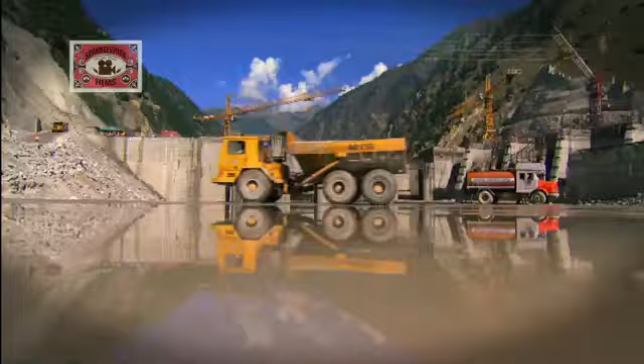Over millennia, Himalayan mountains have fortressed India's northern frontiers. Now, on these very peaks, captains of industry are writing an audacious new chapter in India's power story. They will battle the elements to achieve incredible innovation. It's the ultimate joint venture between man, machine and nature. This is the Karcham Wangtoo Hydel Power Project.

Himachal Pradesh, India's gateway to the Himalayan ranges. Mountainous terrain and stunning vistas make for a tourist's delight. But flowing through these valleys is the key to unlocking India's energy potential, the river Sutlej. These waters are vital to driving the fifth largest power market in the world.

In fact, India's hydropower potential is immense. If tapped, it can generate nearly 149 gigawatts power. But in the race to harness this energy, who is willing to brave the mighty Himalayas?

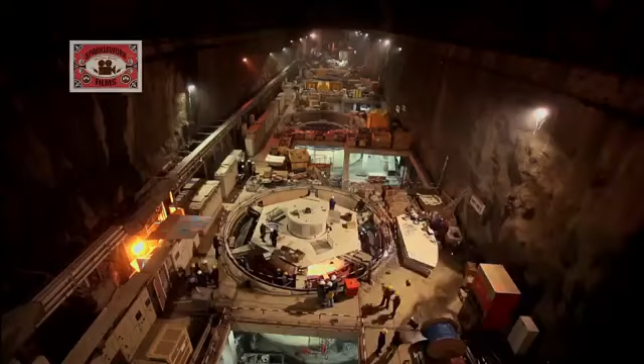When the organization was thinking of implementing the Karcham Wangtoo project, all of us were determined that let us create an aggressive timeline. So we thought let us keep a time frame of 5 years and then we will work out whether we can better it. Now, with the clock ticking, it's all about finding the perfect location.

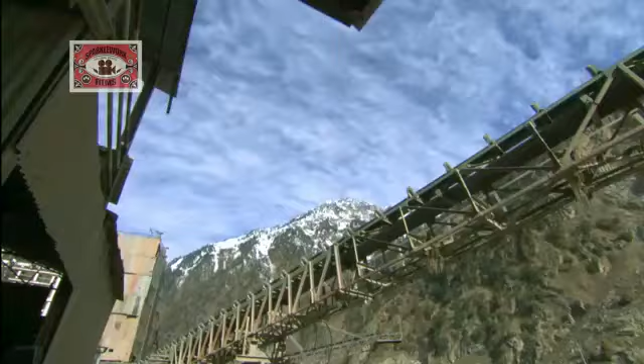At first glance, the tiny hamlets of Karcham and Wangtoo seem an unlikely site to realize an ambitious megastructure vision. Surrounded by jagged peaks, prone to sub-zero winters and accessible only by steep mountain roads. But when it comes to the science of generating hydropower, this valley is tailor-made.

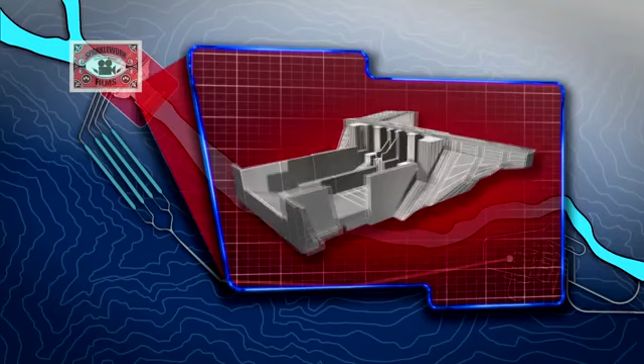The river Sutlej provides the mass of water. The steep gradient between the proposed dam site and the power plant provides the ideal head. The main dam at Karcham will divert a mass of water from the Sutlej into inlet gates. Water will then travel along the nearly 17-kilometer-long head race tunnel, or HRT.

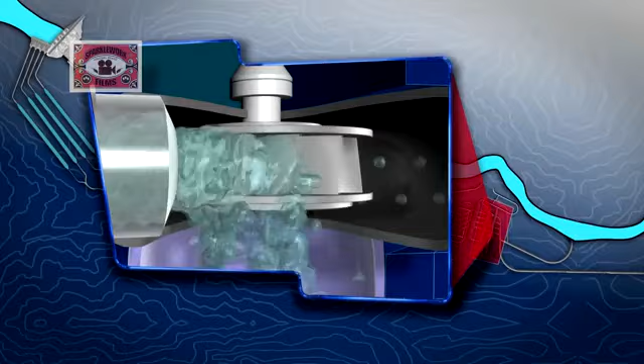From here, it's a steep drop through a height or head into the turbines of Wangtoo's powerhouse. It is here that the river's kinetic energy will be transformed into electricity. Further onwards, the river Sutlej will flow out through the TRT, or tail race tunnel, back on its original course.

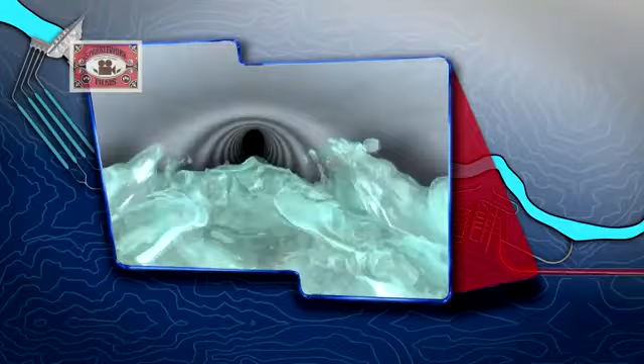With the blueprints in place, it's time to set the works in motion. Strong winds blow across an intimidating landscape, and it's immediately clear setting up this construction site is not for the faint-hearted. In order to realize this onerous task, the builders commissioned their top commander to set up base camp for the men and the machines needed to build this megastructure.

Brigadier Upal brings over 35 years of experience in the Indian Army to the Karcham Wangtoo project. Almost immediately on reaching the site, he knows it's an uphill battle. In the mountain, it's very rare to find a flat piece of ground. A river flowing and hardly a bank of the river, and the bank was also very low, just running along the riverbed. So to create a camp in a terrain of this kind, we had to literally fill up the whole place with a large amount of boulders, stones, rocks, sand to bring it up to the height what it is today.

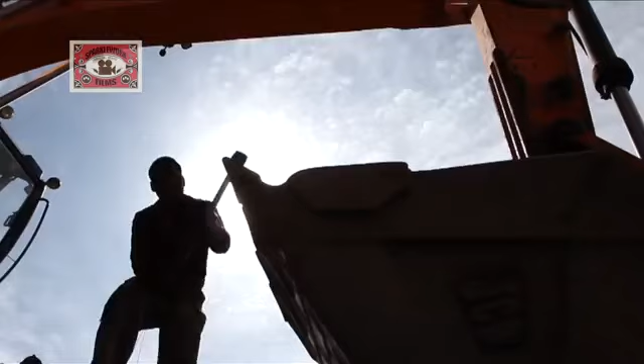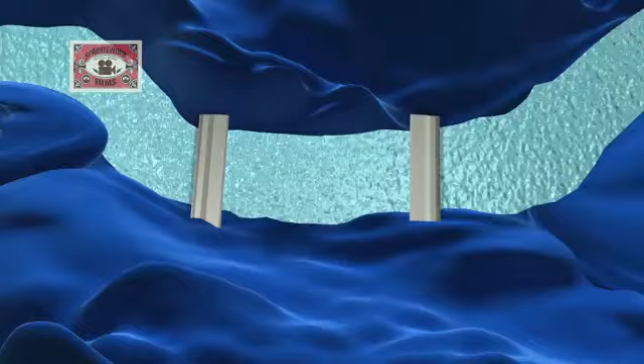Deep in the gorges of Karcham, excavation for the dam's foundation is scheduled. But before digging can begin, there's a river to divert. The Sutlej must be temporarily diverted through a 541-meter diversion tunnel. Two cofferdams will help maintain the river's new course, preventing water from seeping into the main dam's construction site.

Cofferdams are temporary structures, often made from rockfill, which can get washed away with every monsoon. But with the clock ticking on the project's record-breaking deadline, this dam site requires a sturdier fortress. Designers create a cement-reinforced structure that won't need to be rebuilt after the rains. With the Sutlej successfully diverted, it's time now to build the dam.

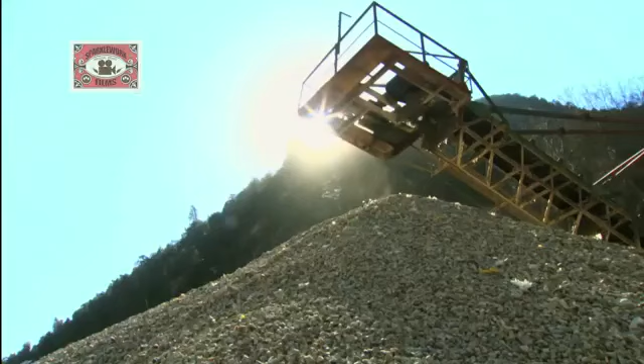At the helm of affairs is Civil Works in charge K.K. Sood. He spent the better part of his life building hydropower projects across India. When I started my career about 33 years back, a 100 megawatt project used to take 15 years for completion, and about 10 to 12 years back, a project of the magnitude of 300 megawatt used to take about 7 years. Now, K.K. Sood's men must ensure that construction on a 1,000 megawatt project is completed in under 5 years.

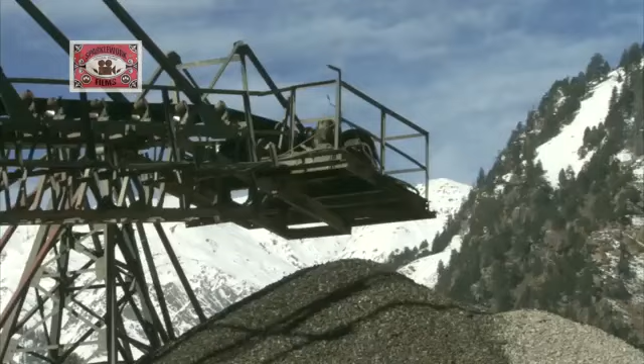But as the team prepares for dam excavation, it realizes that plans set by men are often overruled by nature. Geological tests reveal startling information about how deep the dam's foundations would need to go.

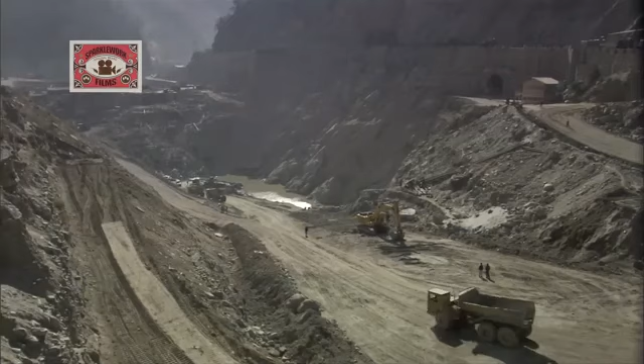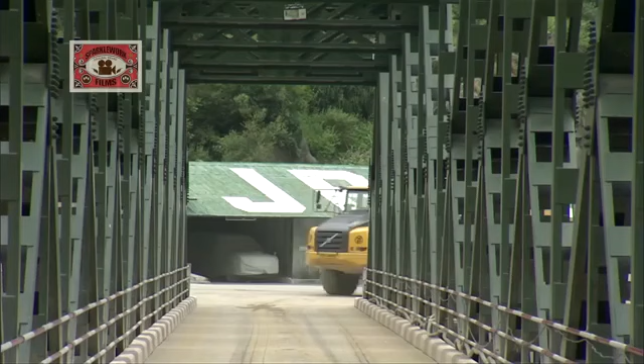Most dam foundations in similar locations go no deeper than 30 to 40 meters below the riverbed. At Karcham, the difference between the riverbed and the dam's deepest foundation level is measured to 53 meters. Engineers now stare at the prospect of going at least 10 to 15 meters further underground. They are faced with two choices: delay the date of completion and miss the deadline, or make way for the big guns of construction.

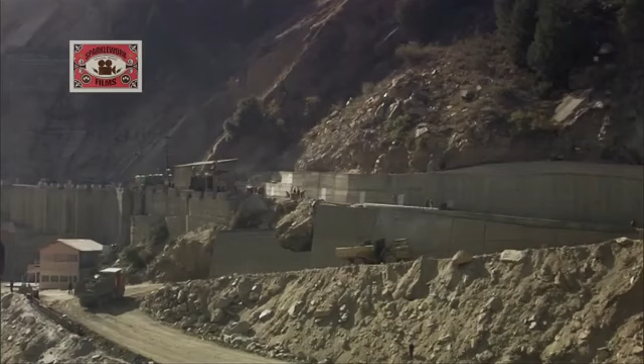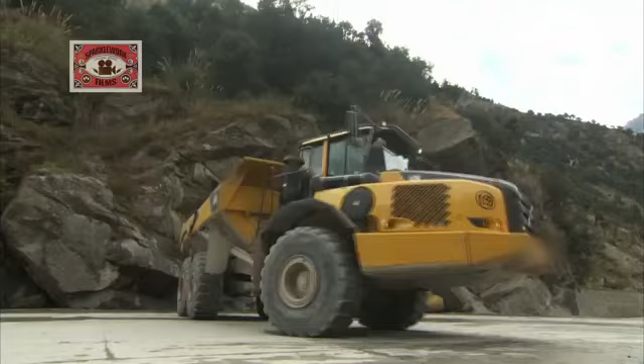Within the stillness of this North Indian landscape, there's frenetic activity underway. The foundations of the main dam at Karcham have reached depths of over 50 meters below the riverbed. Removing the excavated material is a major challenge, one that conventional dumpers literally can't rise up to. So the builders call in the big guns of construction: six-wheel drive articulated dumpers. Their combination of flexibility with pure muscle allows loads of up to 37 tons to be carried up a height of 1 meter along a length of just 5 meters.

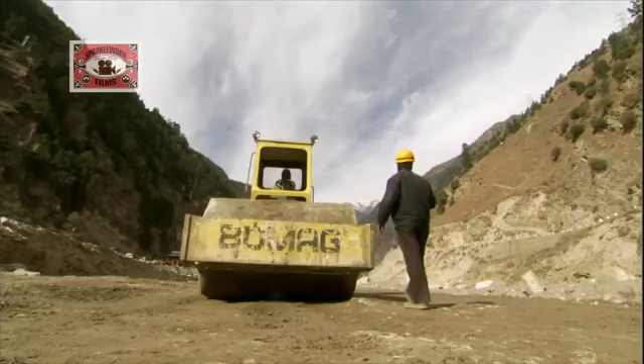While these machines expedite excavation, engineers turn to another pressing concern: securing the cofferdam at depths exceeding 50 meters below the riverbed. The design team takes a bold decision: large-scale cement grouting of the cofferdam's foundation up to depths of an extraordinary 67 meters.

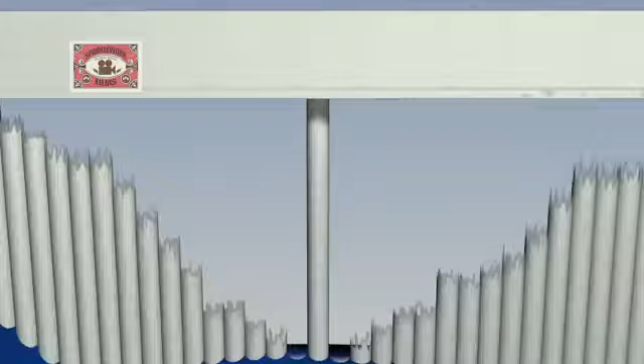We opted for jet grouted columns. This is nothing but an interlocked row of columns of concrete constructed by drilling holes. We lowered a pipe with a nozzle and pumped the cement grout at a high pressure. So there was overlapping of the columns and a continuous impervious curtain in the riverbed was available.

As one problem is solved, another one quite literally seeps in. Work on the 1,000 megawatt Hydel power project is moving along smoothly when a minor trickle in the cofferdam becomes a deluge. The river Sutlej seeps into the main dam site, threatening to undo 2 years of excavation and building. Dam in charge Sanjay Gupta rushes to the site.

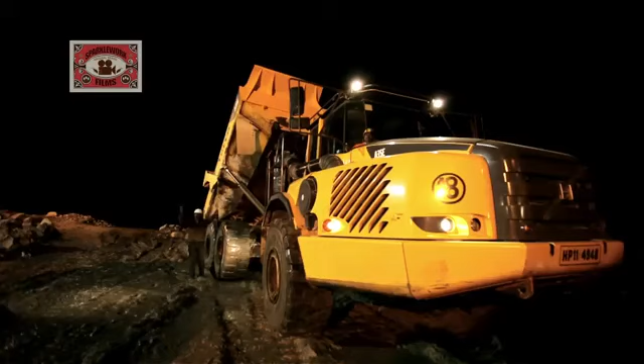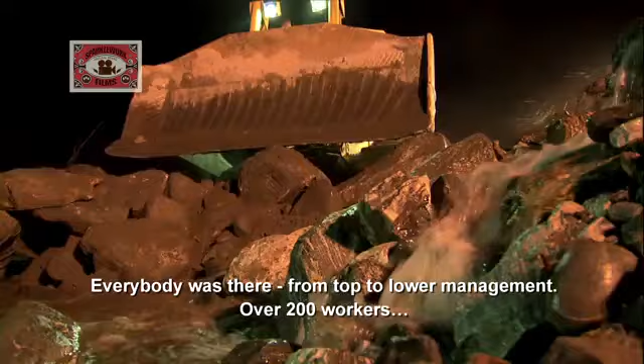Bulldozers erect a wall of rock, while dewatering pumps work round the clock to stem the flooding. Everybody was there. Every man, top management, middle management, lower management, around 200 laborers. That was something different. You can say total satisfaction.

24 hours later, the worst is over. The team has managed to convert a serious roadblock into a badge of honor. But there are bigger accolades to be earned, ones that will truly render the project a megastructure. Engineer Ashish Bajaj picks his steps carefully inside the dam's intake sedimentation chambers.

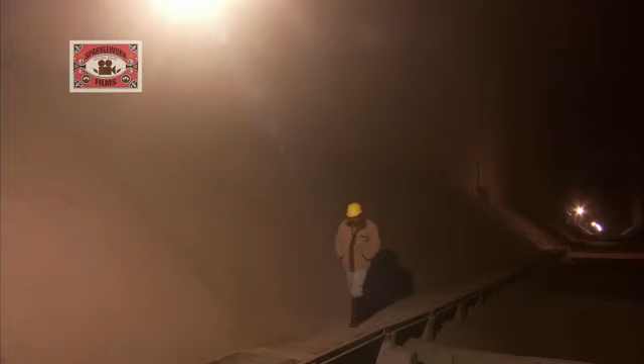Sedimentation is a process that removes suspended solids from water. This cavernous expanse is the project's crowning glory. Its task, taking on the Sutlej's silt menace. The Sutlej carries large amounts of river sediment in its waters. This spells murder for power turbines, where particles as tiny as 0.2 millimeters can shut down massive Hydel plants.

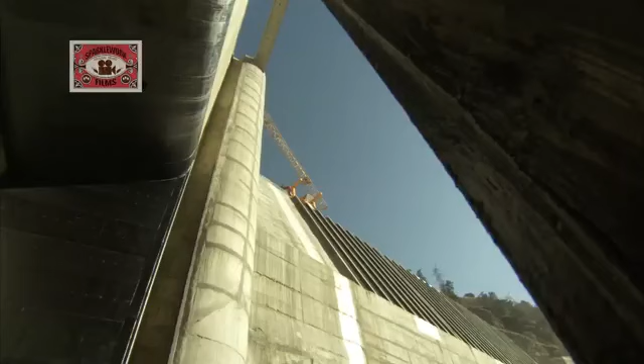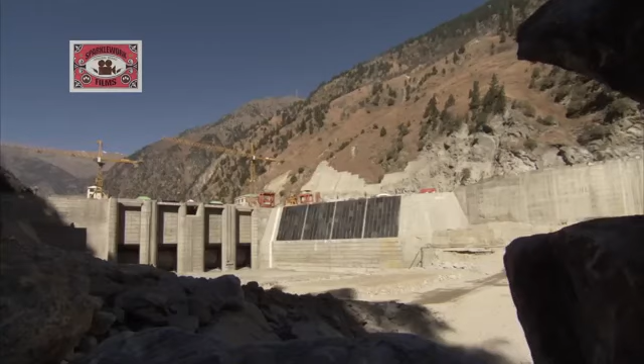To avoid this fate, water is made to enter the tunnel system 15 meters above the riverbed. This ensures that only surface water with reduced sediment flows in. To seal the deal, designers create 4 adjacent sedimentation chambers. Once the dam is filled, from intake it will be 4.5 meter per second velocity of water that will come in.

And in the sedimentation chamber, that has been brought down to 0.3 meter per second, so that the water gets stagnant over here. And there are 53 cones, 53 hoppers, through which these particles will get down to the flushing tank. Gravity guides silt through these 5.25 kilometer long flushing tunnels, back into the river downstream. These are the longest flushing tunnels to be found in the Indian hydropower sector.

But the record-breaking streak doesn't end here. These sedimentation chambers have a design discharge of 504 cumecs. That's a whopping 504 cubic meters of water per second. This is the world's largest chamber volumetrically, and most probably this will be going into the Guinness Book of World Records.

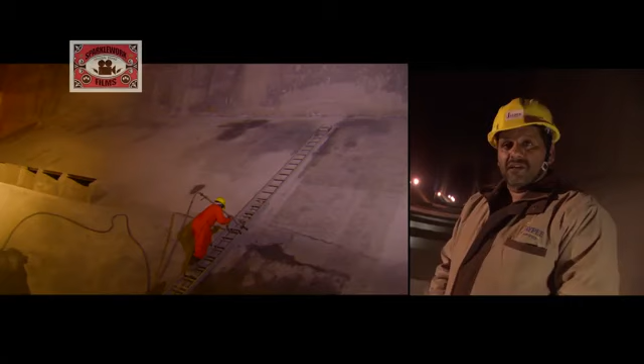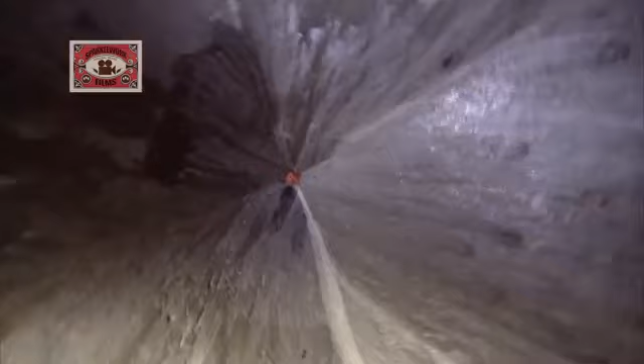This is 424 meters long with 70 meter transitions. That makes it 494 meters with a 35 meter depth and 18 meters wide, all lined. This whole chamber has been reinforced. This is all RCC lining done over here. With the world's largest sedimentation chambers installed, builders have overcome yet another Himalayan challenge.

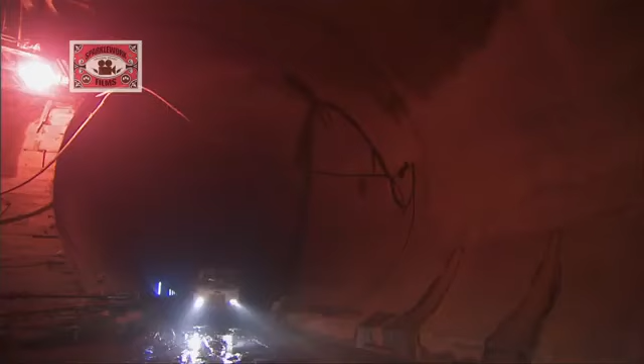As distinct from large storage dams, the Karcham Wangtoo hydroelectric project is a run-of-the-river facility, where the Sutlej is diverted temporarily to run electricity-generating turbines. Then it is restored back to its natural course in the Himalayan gorges. Part of this design involves large-scale tunneling into the mountain. Over 44 kilometers to be precise.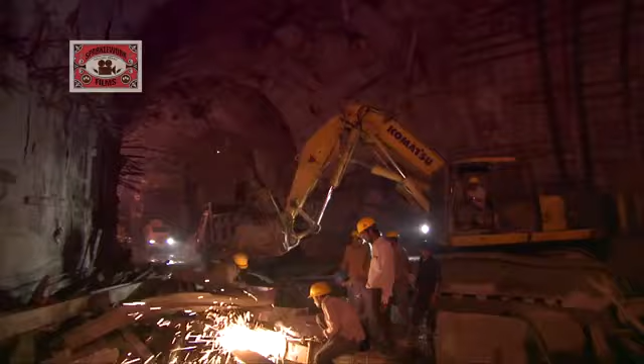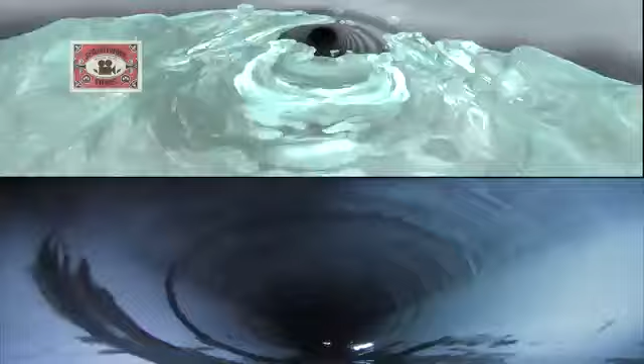Of these, the headrace tunnel is critical to the power equation. It's also the longest. The headrace tunnel, or HRT, is 17 kilometers long, running along a downward slope inside the mountain face. Water taken from the intake hurtles at 4.88 meters per second through a cylindrical tunnel of 10.5 meters in diameter. By the time it reaches the head of the tunnel, it gathers enough kinetic energy to power a 1,000 megawatt power station.

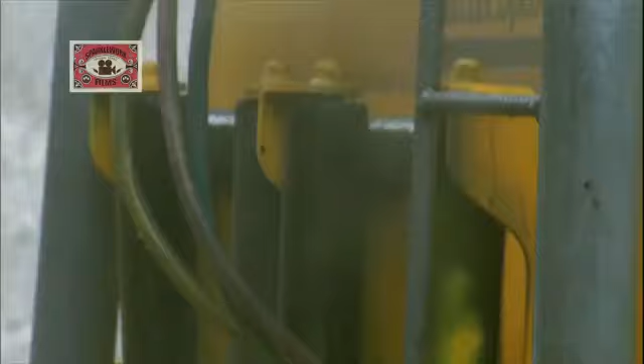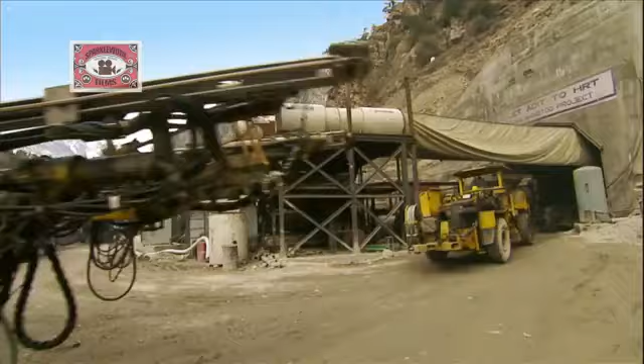But before it can do that, there's some heavy-duty boring to be done. This is the muscle for boring through mountains. Called boomers or jumbos, the project has commissioned a whopping 39 machines on site. The process of advancing is, first of all, we drill holes up to a length of 4 meters with the help of drill jumbos. Then we charge it with explosive, and then the entire charge is fired. After every fire, we get an advance of about 3 meters.

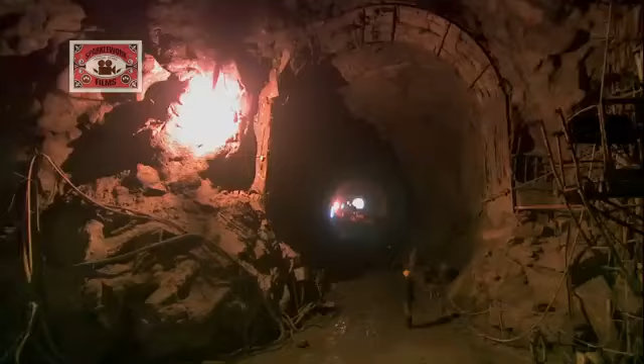For a while, the tunneling team makes good time on advancing along its tunnel path. But things are about to get heated. Soon enough, the builders receive startling information. Workers have run into extremely high temperature zones near one of the approach tunnels or adits. Hot steam is gushing from cracks in the rock face. Extreme humidity and vapors have turned this area into a virtual pressure cooker.

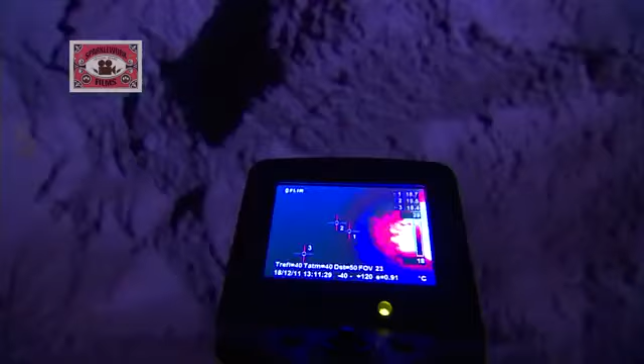What's going on inside the mountain? The answer will come from an elite group of mining detectives. Builders bring in experts from the Central Institute of Mining and Fuel Research, or CIMFR.

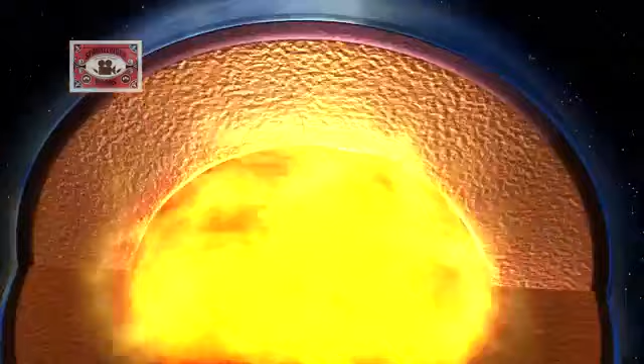Investigators trace these extraordinary circumstances to the Himalayas' fractured geology. We could arrive at a conclusion that it may be magmatic heating. The earth's crust is floating over the very hot magma. So somehow, due to some cracks, this heat is being dissipated. Because it is continuously being released, that means the source has not been exhausted.

Tunneling is immediately halted. Under such high temperatures, there's danger of detonators and explosives blasting prematurely. Timelines set for this ambitious project seem to be going awry.

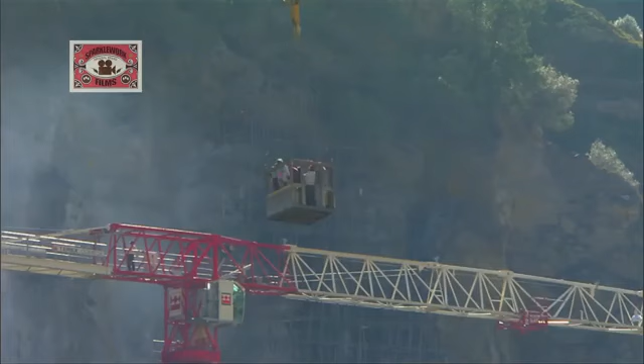Things are getting heated in the Himalayan hamlets of Karcham and Wangtoo. Construction crews at India's largest private hydropower station are facing a pressure situation rarely encountered anywhere in the world. Tunneling into mountains has revealed intense hot zones with temperatures as high as 98 degrees Celsius.

The construction team devises a precisely timed operation. They can't afford more than half an hour to clear an area. Workers rush in and spray cold water on the rock face. Detonators are placed 100 meters away from the rock face. Then the blast is set off. Never before have such extreme circumstances been encountered and overcome in India.

Meanwhile, across the valley, other heights are waiting to be conquered. This mountaintop is the site for the Hydel project surge shaft. It poses a unique challenge for project engineer Samrinder Kumar.

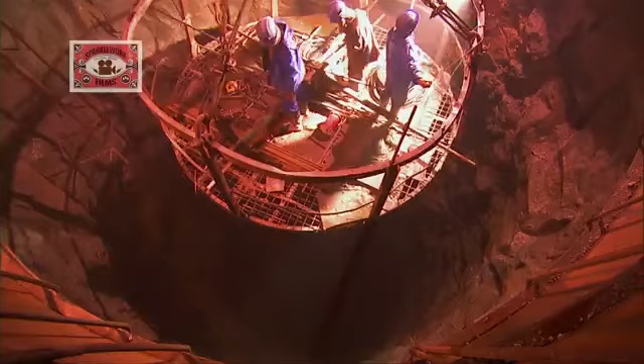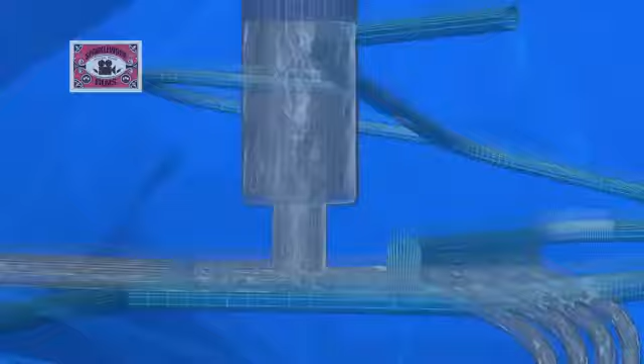Samrinder's team must commence construction on the straw-like shaft that's crucial to ensuring water balance for the entire power station. When water gushes through the headrace tunnel, it passes through pressure shafts and drops vertically down into the powerhouse, turning turbines. The surge shaft is a safety feature to accommodate excess water in case the turbines are shut down for any reason.

Built at the same elevation as the main dam reservoir, the shaft also maintains pendulous pressure balances throughout the system. Basic physics of the surge shaft is simple, but building one is far from it.

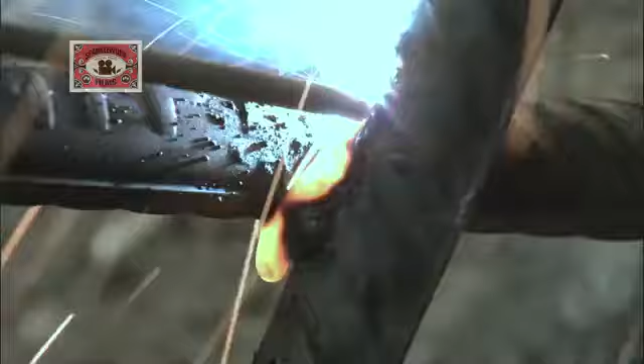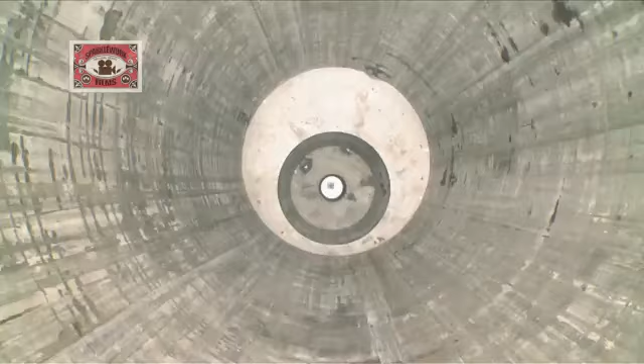Workers climb the 185-meter slope to build the approach road and start work on the surge shaft. Their goal: to complete the approach road without losing a single day of construction. Piece by piece, blueprints imagined by the project's design team are being raised from ground up. Meanwhile, the biggest piece in the power structure is being constructed deep below.

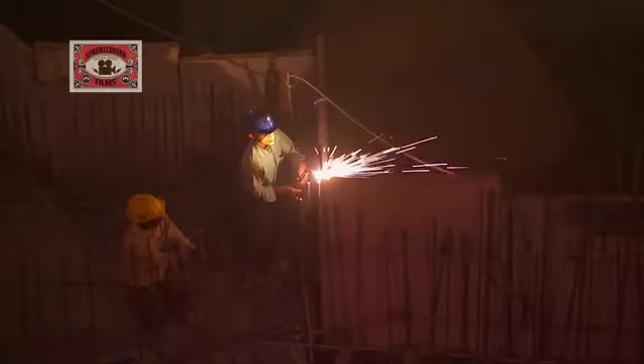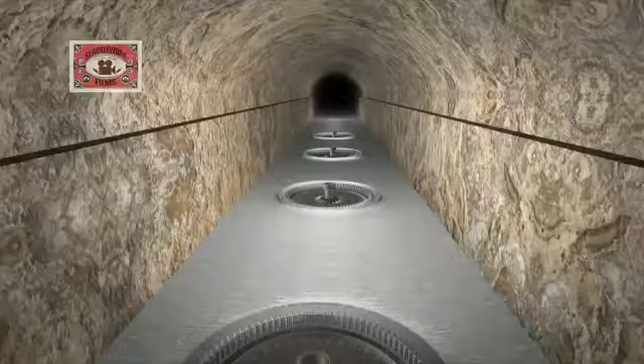Far within the cavernous recesses of Himalayan peaks lies the underground powerhouse of this 1,000 megawatt facility. This is the heart of the Karcham Wangtoo project. It's where the gushing might of River Sutlej transforms into electricity. Keeping this heart beating are 4 state-of-the-art turbines, each capable of generating 250 megawatts of electric power.

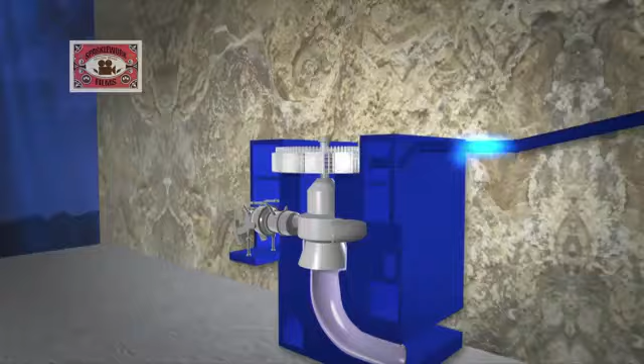Electricity generated in these machines will travel to the transformer hall. Here it will be stepped up, which actually means boosting the voltage of electric current. This stepped-up current will then be evacuated out of the powerhouse through a switchyard into the national electricity grid.

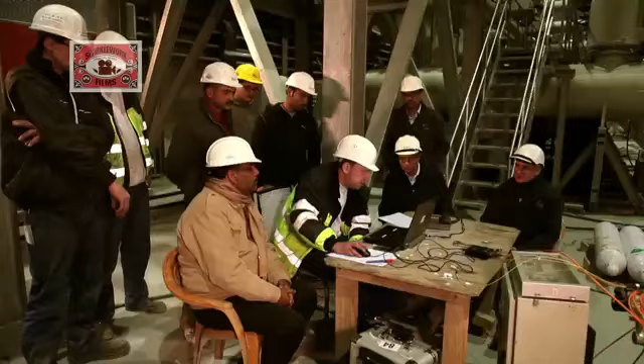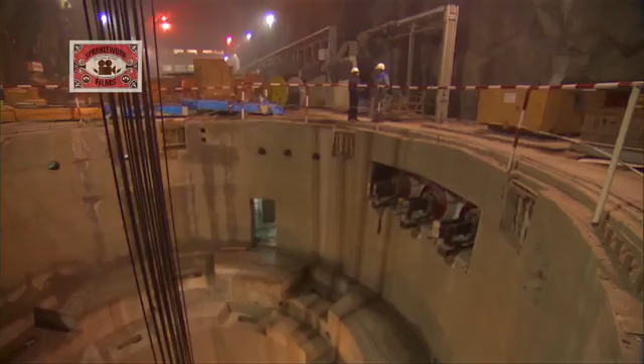At Karcham Wangtoo, veteran hydroenergy engineer Kanti Prasad oversees powerhouse construction and its most critical component, the turbines. The total weight in this turbine, in this generating unit, would be nearly about 700 metric tons. With the powerhouse turbines yet to be commissioned, Kanti Prasad's most immediate task is lowering its massive components into these hollow chambers. It's heavy lifting that will require heavy infrastructure.

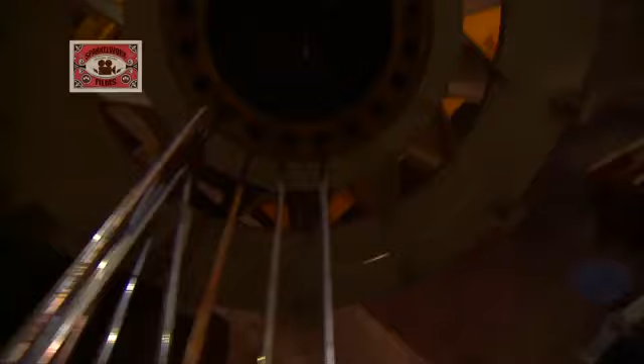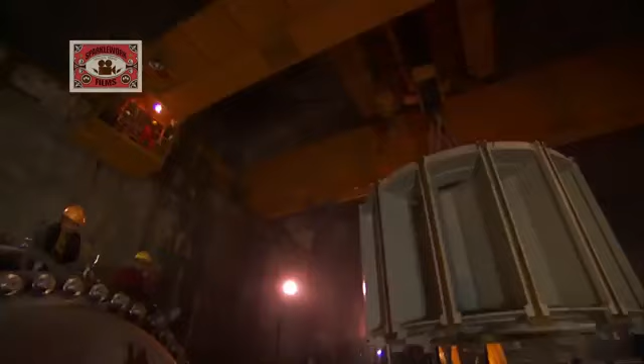This is one of the largest pieces of equipment to be used in the project. The Electric Overhead Travelling, or EOT, crane. This mega crane can install loads of up to 275 tons with an astonishing 1 millimeter precision. But it's not just the numbers that are striking. Ingenious designers have used the cavern's natural attributes to create history.

We decided to make a ledge, which has been done for the first time in the Himalayan geology. We have made a mushroom type of structure in the rock itself, and we have created a crane beam right on the ledge. And on that ledge we have laid our rails, and on those rails our EOT crane is operating. This way we were able to get the crane on day 1 when we reached the bottom, and we were able to erect our machinery much earlier.

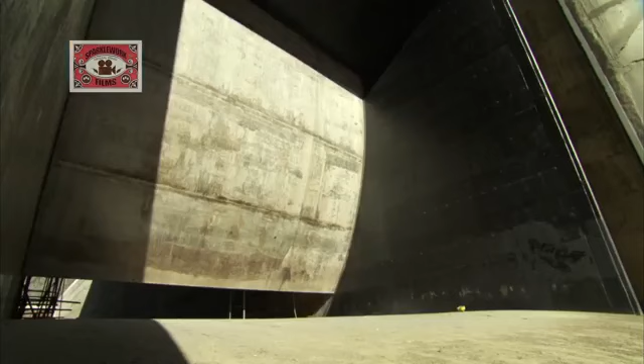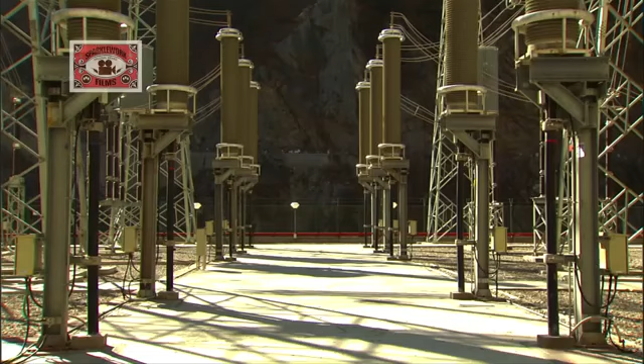At Karcham Wangtoo, works for the 1,000 megawatt Hydel project are nearing completion. It's taken just about half a decade to become one of the fastest builds in the history of Indian hydropower projects. Electricity must now fan out across the mountains to reach the energy-hungry populations of India.

This is the final leg in the power journey. It involves setting up 217 kilometers of transmission lines from the peaks of Karcham and Wangtoo to Abdullapur in the plains of Haryana.

The higher altitude we are traversing is around 2,450 meters. The difficulty in this area is that we have very steep slopes where the positioning of the tower itself is a problem. So to negotiate that slope, cut that slope and lay the tower... sometimes the slopes are so steep that a single person cannot stand on that point. In my opinion, this transmission line is one of the toughest lines which we are laying in India.

In the absence of motorable roads, over 500 transmission towers must be built by hand, with materials and equipment transported manually across the harsh terrain. Collectively hauling the nearly 50 tons required to build one single tower, it's often a steep climb through uncharted territory. But where footpaths end, workers must take to even more dangerous ways to cross the valley.

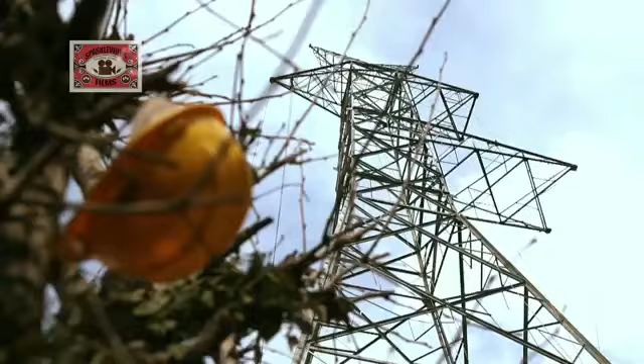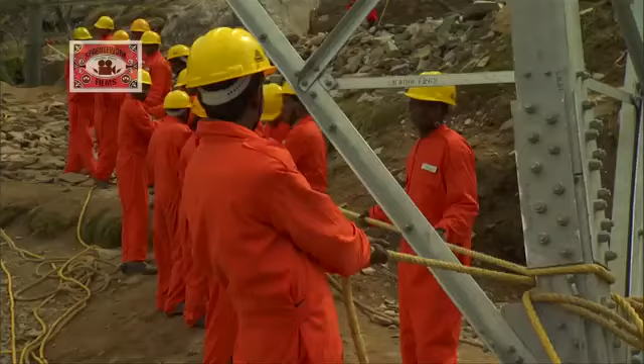This is how workers transport building materials and equipment between two transmission towers, sometimes across distances of over a kilometer long. Once the towers are erected, 400 kilovolt conductors and insulators weighing approximately 30 tons are pulled manually to be strung up on the towers. 7,000 workers have banded together to create a network of transmission towers collectively weighing a massive 25,300 tons.

The day is not far when the fruits of their labor will be realized in full megastructure glory. Inside the completed powerhouse, it's a very big day. It's time to lower the multi-million-dollar rotor into its turbine chamber.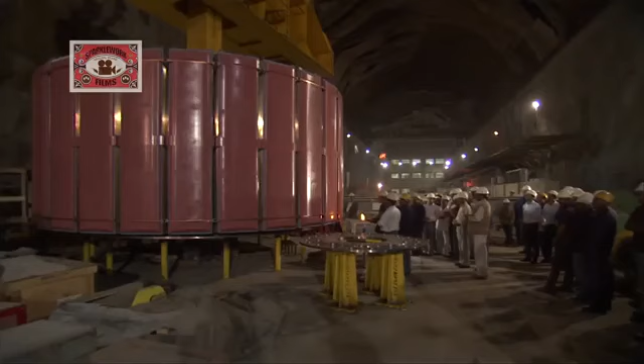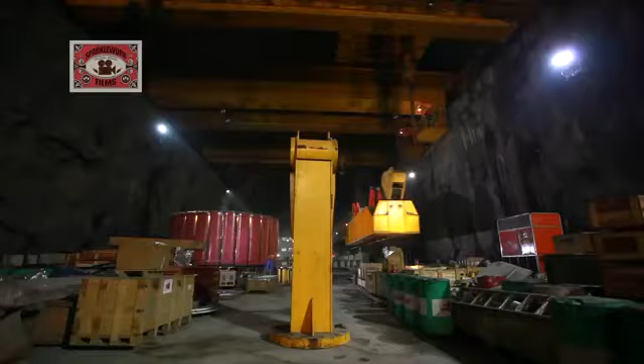475 टन लोड है. High precision EOT cranes take center stage to execute the job.

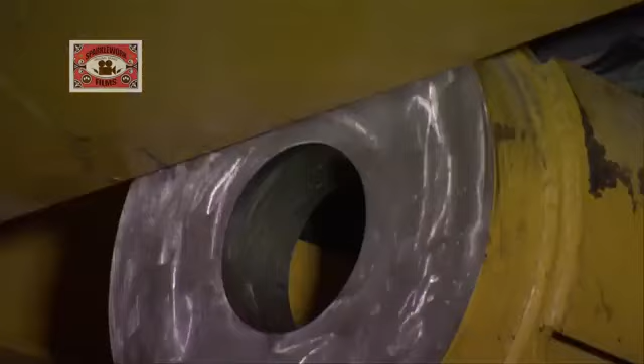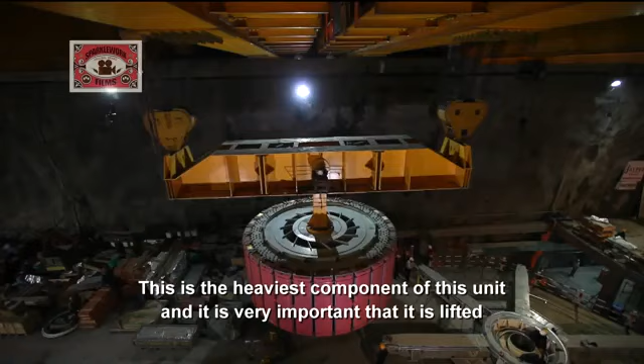All eyes are on the cranes. It's a very precarious operation, with nearly 500 tons of metal and millions of dollars hanging in the balance. This is the heaviest component of this unit, and it is very, very important that it should be lifted and lowered in the pit very, very carefully. Otherwise, a small mistake can play havoc with the machine as well as other components, because the whole load is coming on the cranes. Slowly but surely, the rotor inches closer to its destination.

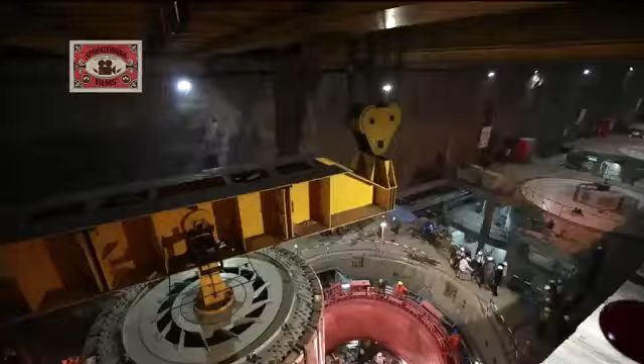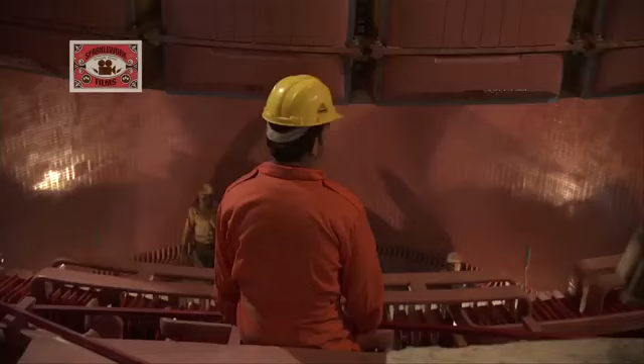On the ground, anxious engineers wait to receive the mammoth component. For the powerhouse team, this is a cliffhanger moment that leaves no room for error. As it lowers, its trajectory is mapped to exact precision. Not a millimeter must be out of sync. It's like a 3-hour movie which you are watching in the theater. Now we have come very close to the commissioning of this unit.

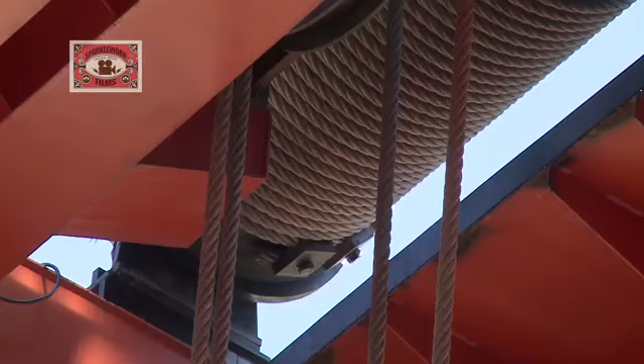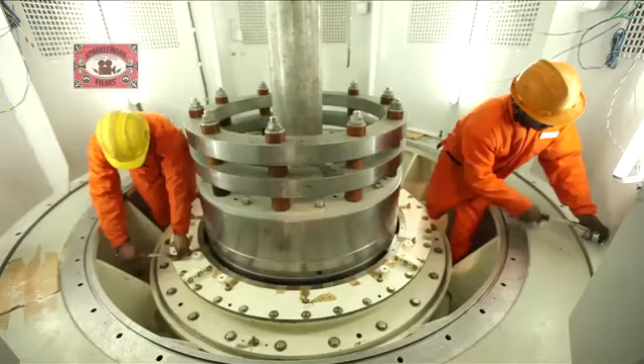Upstream at the main dam site, the gates of the dam are lowered, and the reservoir of the Karcham Wangtoo hydroelectric project begins to fill up for the first time. Inside the powerhouse, pre-commissioning checks are at a critical stage. There can be no room for error as the water makes its way across the 17-kilometer head race tunnel to reach the powerhouse's threshold.

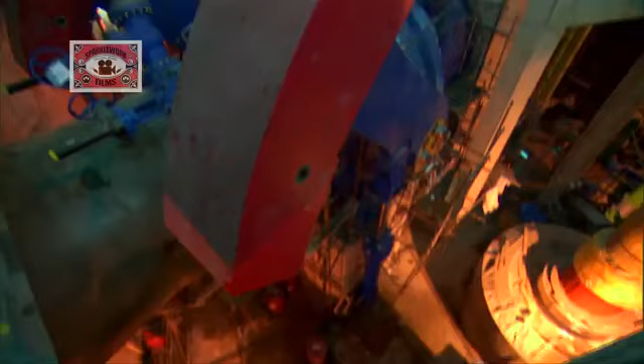For the first time, huge butterfly valves are opened to release water into the pressure shaft. All systems are ready to go. It's time for JP's visionaries to set the wheels of their dream project in motion. It is now on record that in the Indian power plane, Karcham Wangtoo project is the largest project to get commissioned, whether it was private sector or public sector space.

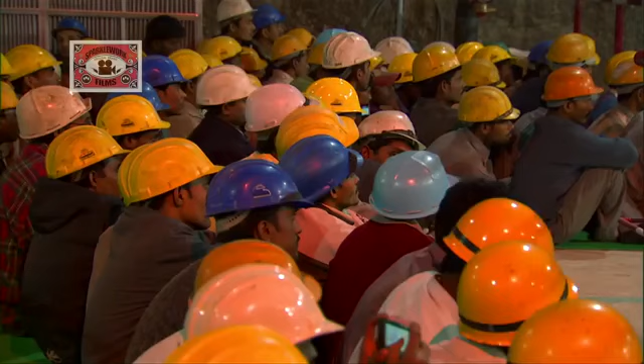The JP Group's founder touches down at the remote Himalayan location to inaugurate his company's latest milestone. Divine blessings are called upon to anoint the cutting-edge facility. The hall crowds with the faces of all those who have worked tirelessly to complete construction in a record time of a little over 5 years. At a specially appointed hour, Jaiprakash Gaur formally commissions the first turbine.

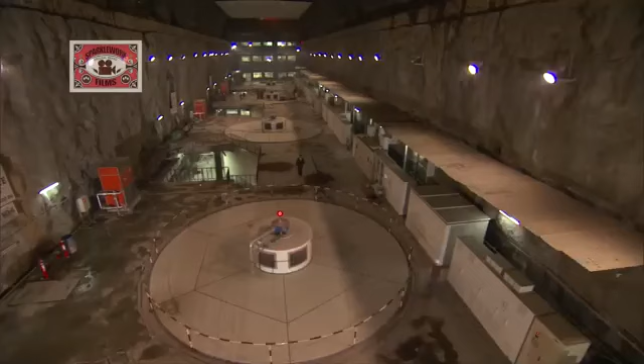The Karcham Wangtoo project is one of the group's crowning achievements. I am one of those power engineers who had the privilege of working from 2.5 megawatt to 250 megawatt. So you can imagine my own happiness. With the 4 turbines working to full capacity, the business of powering a nation gets underway. This is only the first chapter in this Himalayan project's megastructure story.